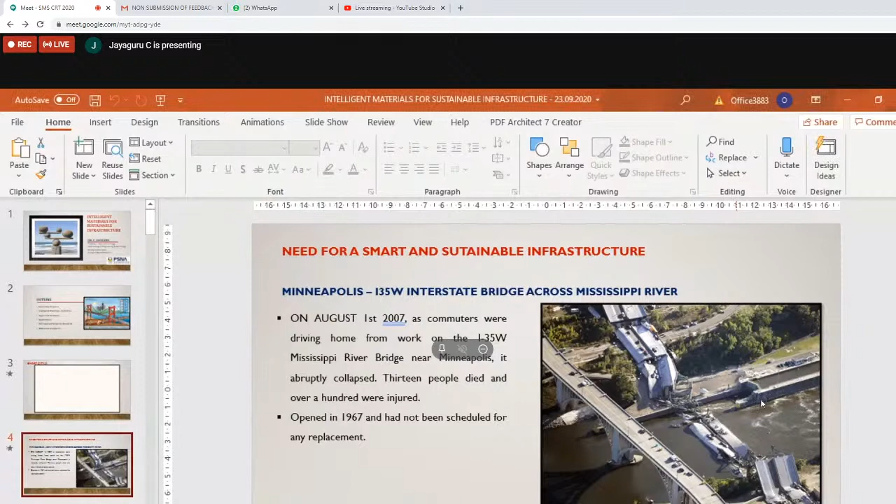Okay, then in that case, let me have the videos here. Is it audible now? No, sir, not audible. Okay then, let's leave it.

It's not a problem, let's go to the presentation. It seems video is not smart. Cities are smart, videos are not smart. Okay, then it's not a big issue.

Okay, now let's come back to the presentation. Why are we speaking about this smart and sustainable infrastructure, or where is it needed?

Actually, is the voice now audible? Rajesh Kumar sir, is the voice audible? Yes, your voice is audible, sir. Okay then, I'll skip the videos because there is some problem with the video presentation. It's not a big issue.

Now let us look into the meaning of the word sustainable. When we look into the simple definition, it is able to be maintained at a certain level. That is, we have to maintain some resource, environment, or material performance at a certain level without compromising the ability of future generations or their future responsibility or functionality. That is what is called sustainability.

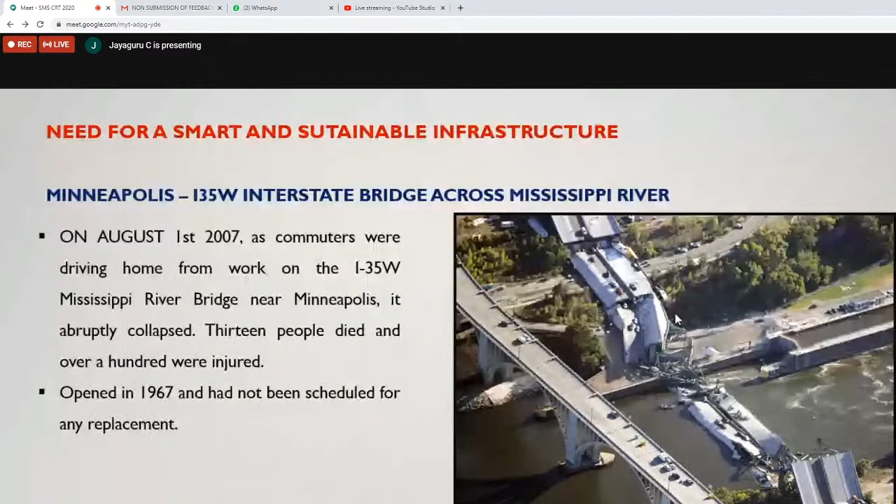This bridge is a truss type bridge with concrete girders, actually a steel concrete composite. It abruptly collapsed. When it opened in 1967, they were planning for scheduled maintenance, but though there was some little level of maintenance, there were no proper repair or replacement strategies. So in 2007, all of a sudden, the bridge collapsed.

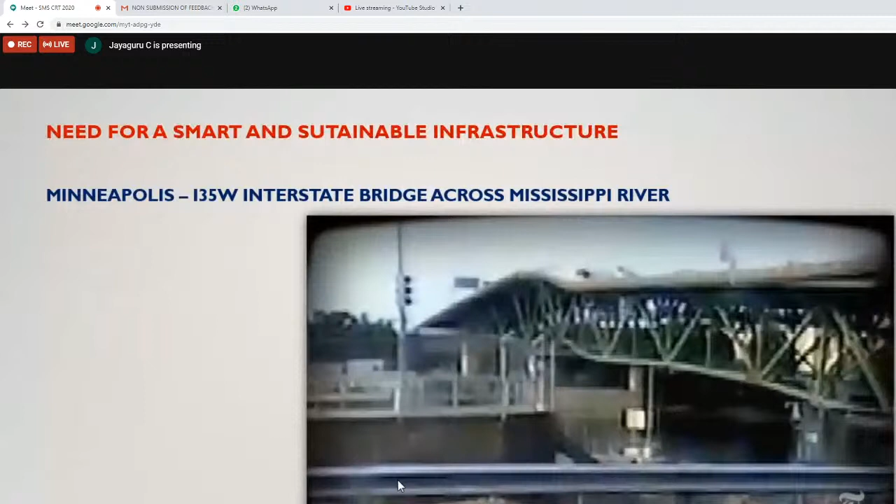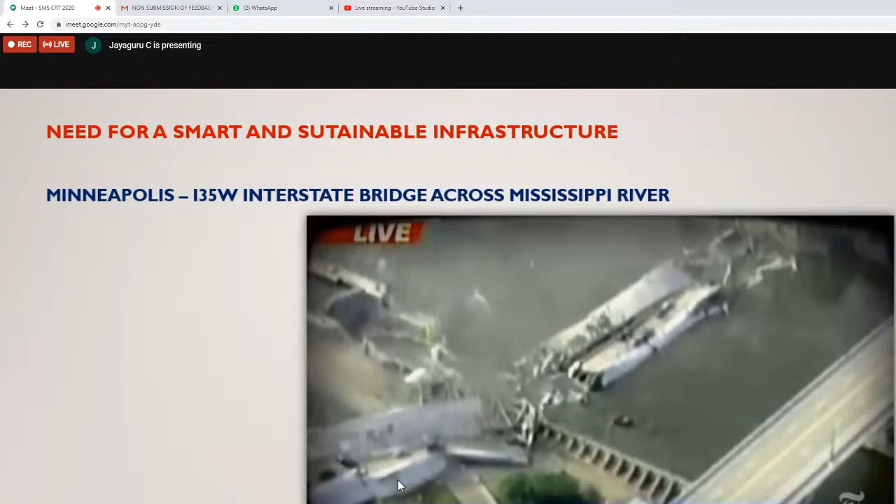Again, there was a video about that bridge, but I think you may not be able to hear it. Okay, I think there is a problem with the audio.

What actually happened here is in 2005, during an inspection, they reported that the structure was structurally deficient and repair had to be done. But the local authority in Minnesota state said all the bridges are having problems, so they simply ignored the engineers' information to go for repair. So the bridge all of a sudden collapsed. This means we need to do something to monitor the level of performance of bridges.

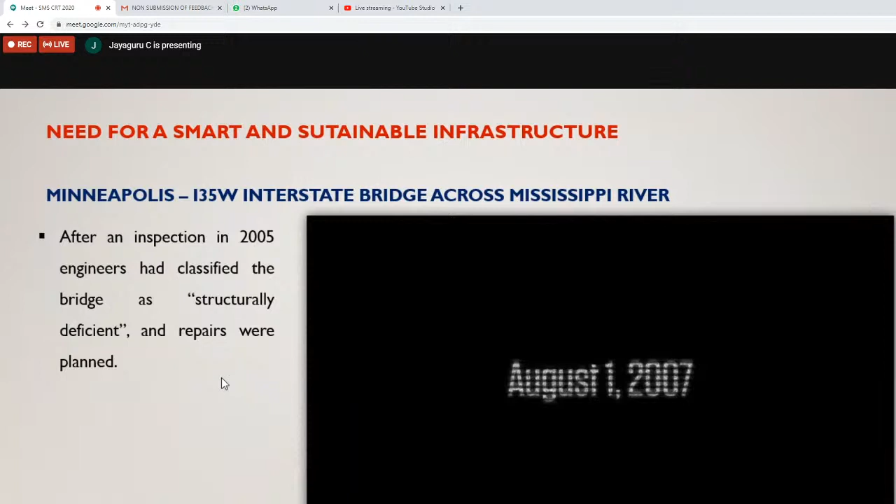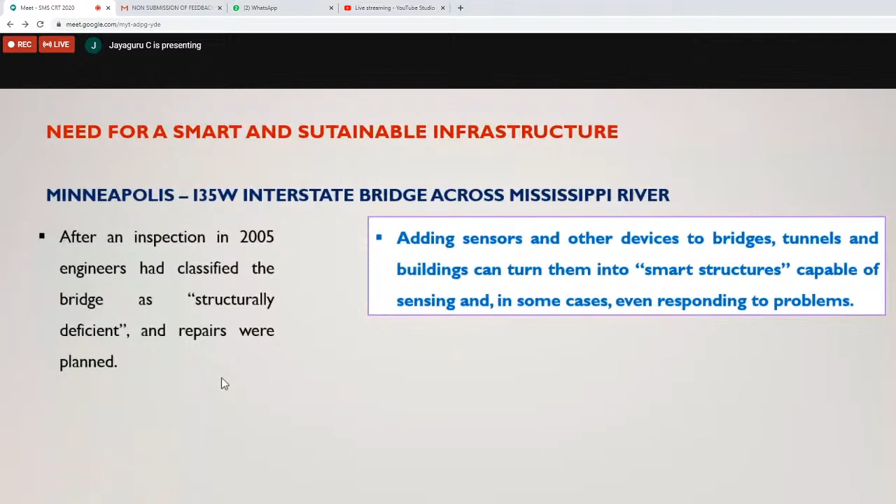So what is the ultimate solution? Adding sensors and other monitoring devices to bridges, tunnels, buildings, etc., can turn them into smart structures, capable of sensing, and in some cases the material can respond to the problems.

With this, let me go into the next slide on smart city features, where these intelligent materials are needed. Let me take the smart city features context from our Ministry of Housing and Urban Affairs, because our government has taken one of the thrust areas as installation or erection of smart cities all over the country. As per the statement of our Honorable Prime Minister of India, within 10 years many cities should be smart, and they have allotted a lot of funds or budget for that.

So from that smart city feature definition, I have taken this word. What they are telling is, in that last context, the government is giving many features.

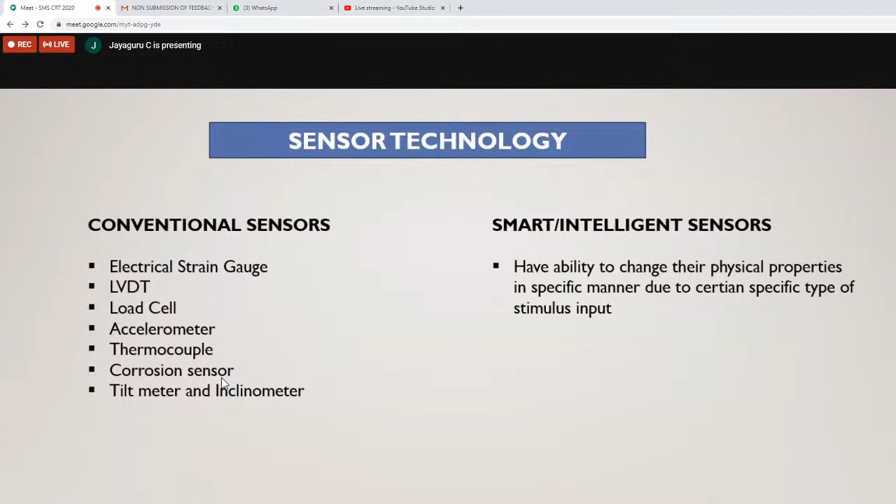Before looking into the first material, shape memory alloy, I would like to give a definition for smart civil engineering infrastructure. A car we are buying for some 6 to 10 lakhs has got nearly 10 to 15 sensors in it. Why can't a civil engineering structure have a sensor?

The structure can automatically adjust its structural characteristics and respond to external disturbances, particularly for its safety. So we have to incorporate these types of sensors in buildings to improve their lifetime and serviceability. Smart materials can be integrated into a structure to provide functions such as actuation and monitoring and self-adapting. The previous speakers would have addressed self-healing concrete, where the concrete is able to lock its cracks. Those types of materials are also smart materials.

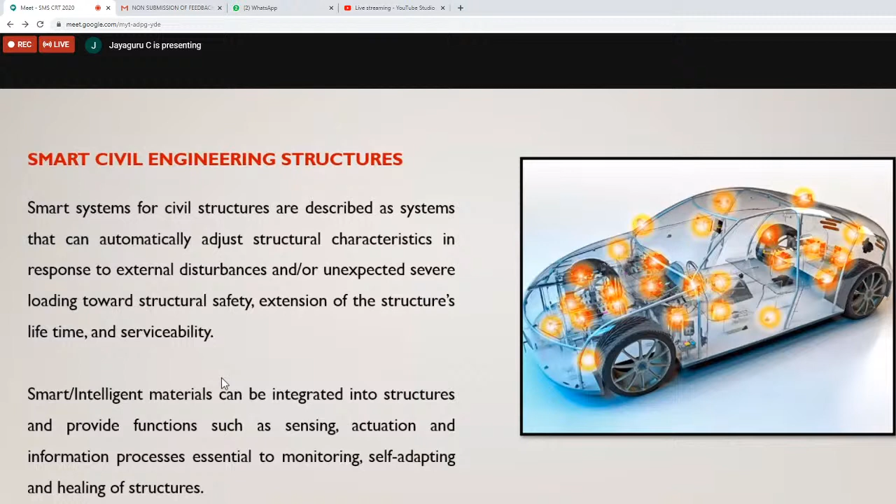So comes the shape memory alloys. Though the morning speaker has addressed it, it is my responsibility to define it again. I am going to look into only the applications, not the technical part. Shape memory alloy is a metallic alloy that possesses the ability to regain its previously defined shape or size when subjected to appropriate thermal or mechanical changes. Mechanical in the sense, some extension.

In civil engineering, shape memory alloys can be either passive, semi-active, or sometimes active. Particularly in the case of seismic safety, these shape memory alloys will be used as an active device to reduce the effect of earthquakes, particularly the deformation, as they have more ductility or good mechanical behavior.

What are the types of SMAs available in the industry? One is copper, aluminum, and nickel alloy. Then comes nickel and titanium alloy, that is actually called nitinol. Then comes zinc, copper, gold, and iron alloy, which is a ferrous alloy. Out of these three, or a few other alloys are also available.

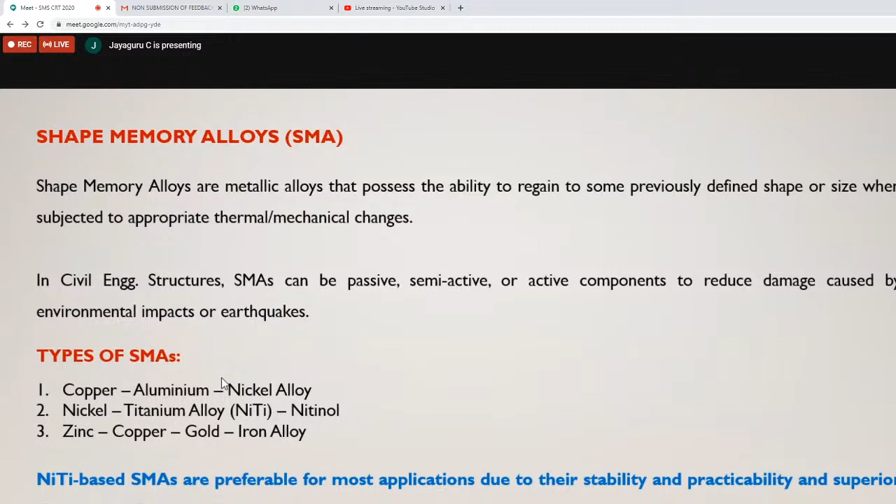The nitinol based, or nickel and titanium based, shape memory alloys are preferable for most applications in aerospace technology as well as civil engineering applications, because they are highly stable and have superior practicability and thermomechanic performance. This nitinol has two unique properties: one is shape memory effect, the second one is super elasticity.

The shape memory effect, I am going to say, is only on heating. This is a phenomena wherein the shape memory alloy will return back to its predetermined shape upon heating. So when you are able to heat it, it will have that memory in it and it will come back to its original shape.

For example, you have given the memory to be a spring. On YouTube, many videos are available showing examples with a nitinol spring. When they extend the spring and convert it into a rugged shape, and insert that into hot water, the spring will revert back to its original shape, the nitinol wire will revert back to the shape of a spring. Apart from that, nitinol has got super elasticity, or a high level of ductility, particularly in the nonlinear behavior.

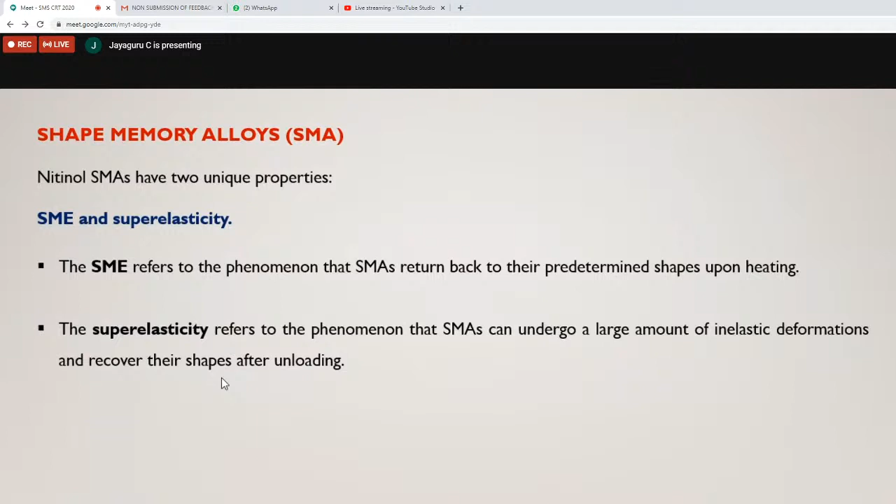It has got the phenomena wherein it can undergo a large amount of inelastic deformation and it can recover its shape even after unloading. That is a mechanical performance, it will be having a good thing. So here the two things.

The morning speaker was speaking about austenite and martensite. Look at this second diagram. The bottom level was austenite. When the stress is increasing, it becomes martensite. There are two crystal phases in shape memory alloys. The austenite phase is stronger, and at higher temperature, it will be in the austenite phase. When it has a low temperature, or if the stresses are high, or you have given some elongation, it will convert into a martensite phase.

Here you can see the second picture. From the austenite phase, it is transforming into martensite phase. That is when you are giving a stress and there will be a strain. When you remove the load, it converts back into austenite phase. Here, the original shape is like this. You are deforming it into some other shape, and after heating, it will return back to its original shape.

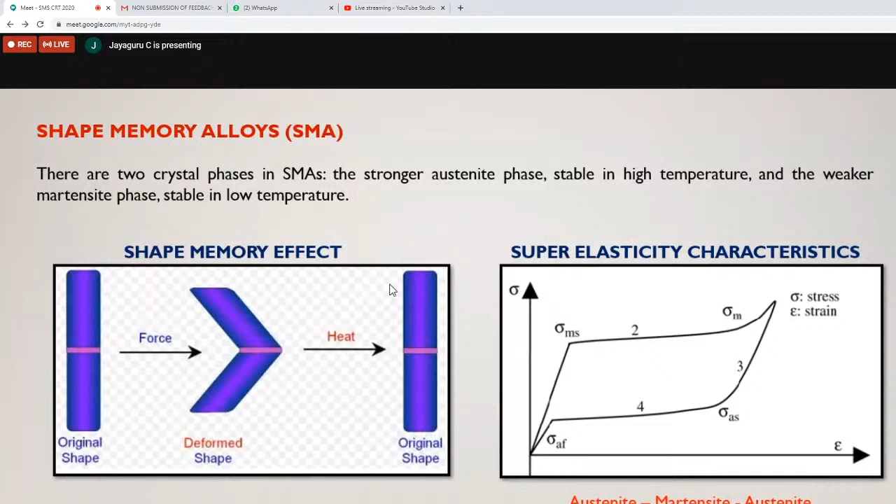So here, actually, I have got a video. Please bear with me, even without audio I think you are able to see it. They will be illustrating the performance of this nitinol wire, wherein you can see two major physical features, that is the performance of this nitinol. One is the thermal performance, that is when it is heating, it is coming back to its original shape or idea, and when it is deformed, it is going back to its previous shape. Just have a look at this video, please bear with me, even without the audio.

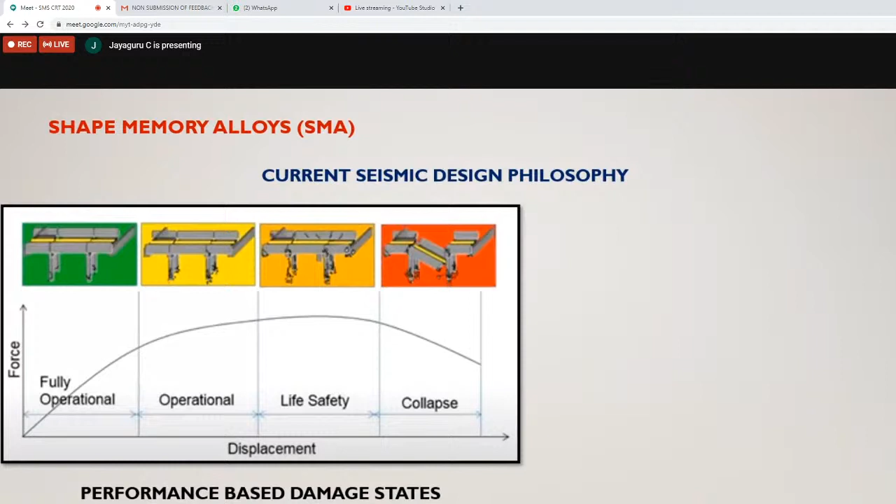But what will happen to the infrastructure? You look into this picture, there are hinges formed at the top of this pier and even at the bottom of the pier, which we cannot repair even after a severe earthquake. So what will happen in those cases? For example, the government is constructing infrastructure, bridges, at a huge cost, several crores of rupees will be invested. And if these damages are permitted, what will happen? Is it really a success? Imagine there is a bridge connecting two cities or two important places, and that bridge is totally collapsed or has lost its performability after an earthquake. So what will happen? That bridge has to be reconstructed after a few years, or it should be closed for traffic, and severe repair actions have to be taken on.

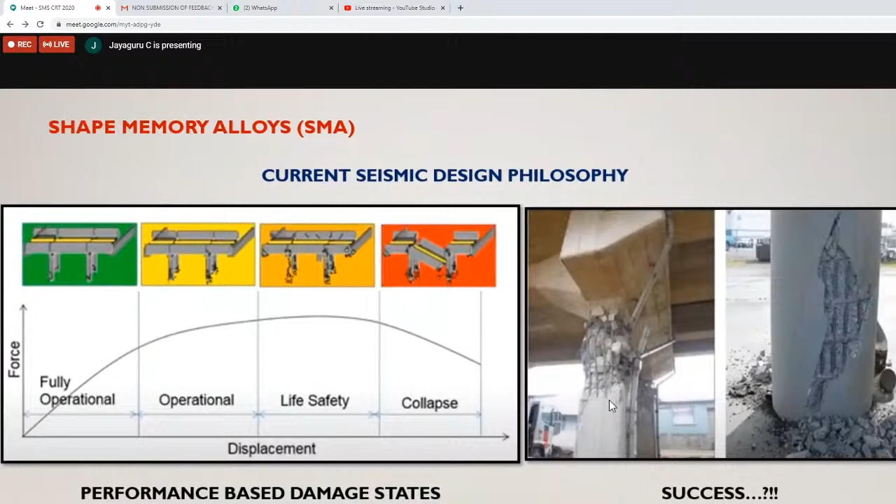So in these cases, we have to look into the next level, that is performance based design. So what is that performance? How to improve the ductility behavior of such bridges? So here again, in University of Illinois, they have tested 4 sets of columns to understand the super elastic characteristics of shape memory alloy. So what they have done is they have gone for retrofitting. In the first column, they were testing with cyclic load behavior, without any retrofitting. In the second column, they retrofitted with the normal conventional method. So can anybody switch on the mic and say what is the conventional method of retrofitting a bridge pier?

It's a carbon fiber wrapping or jacketing, exactly. That is the very standard conventional method we follow nowadays. In olden days, we used to go for concrete jacketing or ferro cement jacketing, but nowadays, as pointed out, we go for carbon fiber sheet wrapping. Many researchers have completed studies on this, and it's in practice in many countries. Even in our country, we use CFRP jacketing or GFRP jacketing.

In this video, there's again a problem with the audio. What this Illinois team has done is test a normal FRP jacketed column with cyclic loading, and they incorporated SMA wire spirals to improve ductility behavior. In the fourth column, they made a hybrid combination with FRP as well as super elastic shape memory alloy wires, and that fourth column had an extraordinary performance.

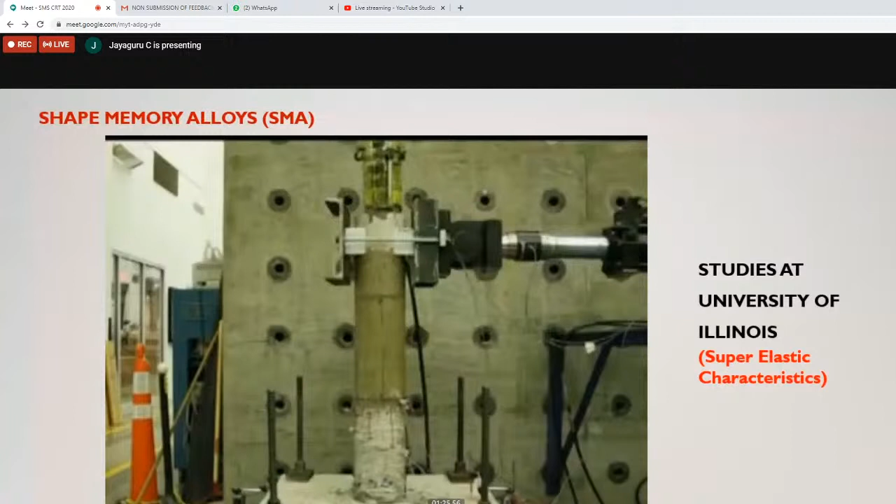In this picture, you can see there are spirals as well as FRP jacketing. When tested with cyclic loading using a servo hydraulic actuator in a strong floor, they exhibited much better performance with a very low level of rupture, and there was no crack. All the cracks were arrested. What was happening is the shape memory alloy gave a good level of ductility. In the next slide, I'll show that.

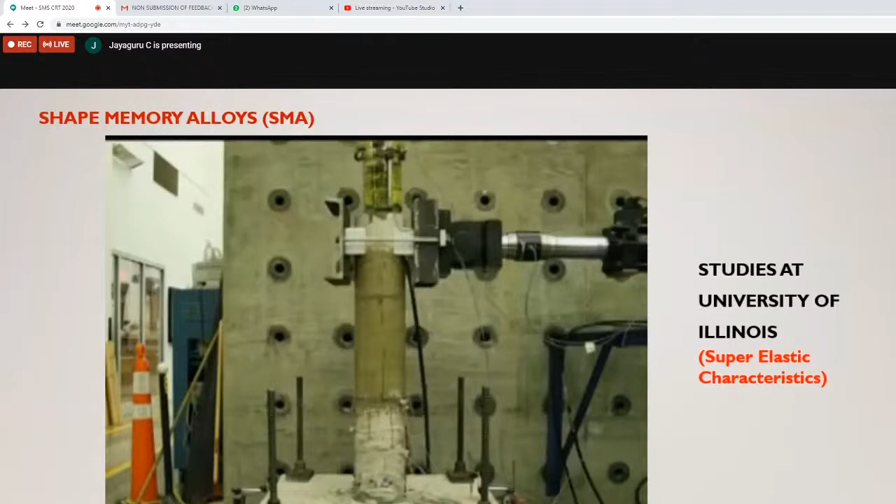Normally when you take a conventional rebar, even a HYSD bar, after the yield point, as the speaker in the morning presentation also pointed out, it goes into an inelastic range, and when you remove the load, it undergoes permanent deformation. So there will be permanent deformation in HYSD bars or any ductile bars.

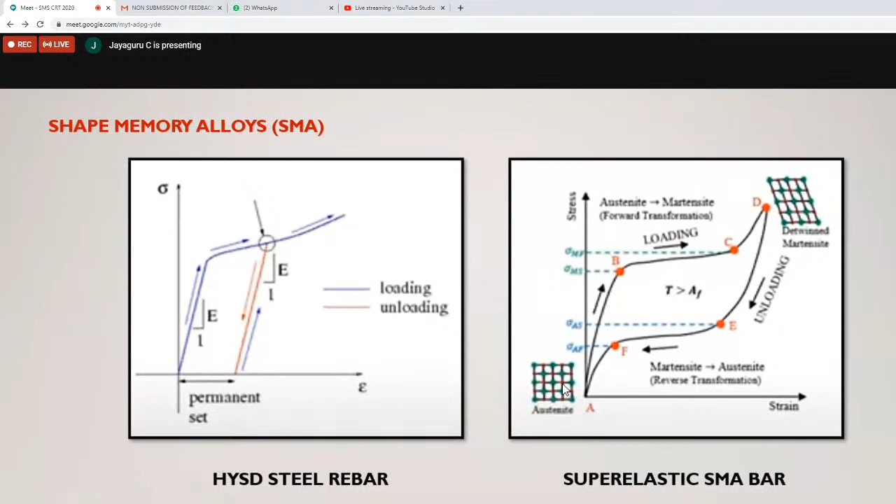But in the right side picture, when you apply stress or load, particularly during earthquakes or cyclic loading, the material goes into the martensite phase and comes back to the austenite phase, so there is no permanent deformation. The material remains as it is. When you use this rebar in a column, the material stays as it is and the column achieves a good level of ductility, extraordinary ductile performance.

In the next slide, you can see when a steel reinforced RC column undergoes reverse cyclic loading, the hysteretic curves show a higher level of deformation, whereas with the same amount of hysteretic curves for the SMA case, the deformation is similar but there is no permanent deformation. When you complete the test, the column remains as it is with only a few minor cracks, and there won't be any problem.

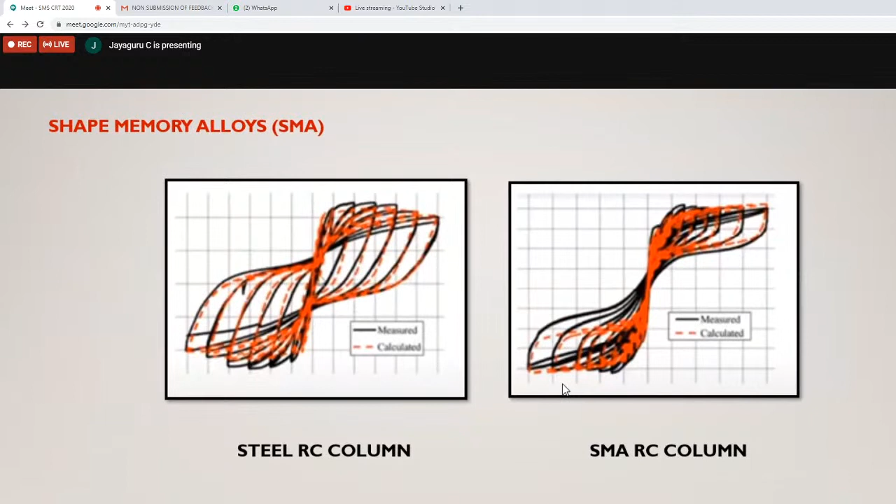What we can suggest here is, as faculty members, we can go for a good amount of research. At CBRI Roorkee also, they are doing research with this SMA reinforcement. We can also start our own level of research, go for severe studies, and go for analytical investigations.

Now looking into the analytical investigation: whenever you're identifying some shape memory alloy, particularly nitinol, we normally do a moment curvature analysis. For those who want to do analytical investigations, I'll give a small idea. We have to choose the moment curvature characteristics of that particular RC section with the shape memory reinforcement, go for incremental dynamic analysis, and set the performance limit, that is life safety or collapse.

Normally when you do pushover analysis, particularly in software like SAP 2000, you fix the performance limits. If it's a critical structure, immediate occupancy will be your performance limit. If it's a normal structure, we can go for life safety as the performance limit. You set the performance limit and identify the dynamic pushover curves for different ground motions, with the percentile curves varying. Finally, you obtain the drift limit and select it so you understand the performance level of different SMAs.

So I would insist many research scholars, budding engineers, or budding faculty members in this audience go for more research in shape memory alloy reinforcement. Even though the material may be costly at present, with gradual application we will be getting it at a cheaper cost, and you can go for analytical investigations.

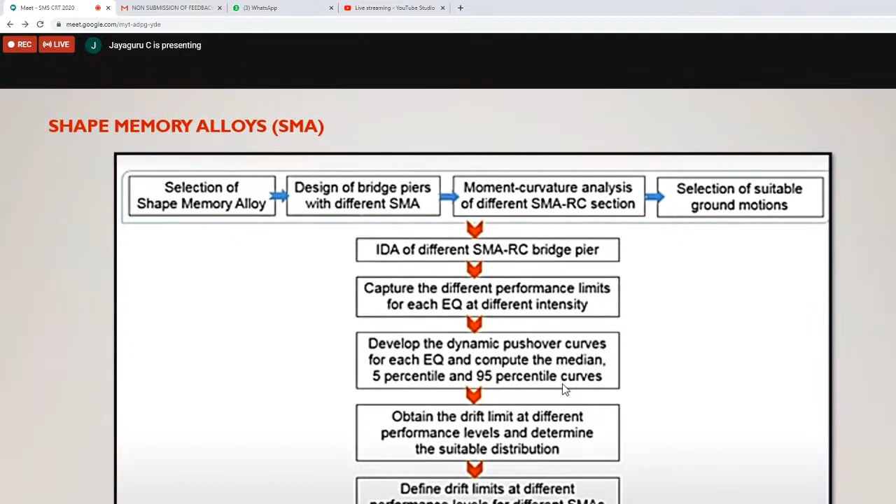So then I am going to shift into the next material called magnetostrictive material. This is the second material in my list. So what actually is magnetostrictive? As I defined already, every smart material will have certain change in their characteristics. So here what this material is doing is, when exposed to a magnetic field, it will change its physical shape.

You can look at the picture here. There is no magnetic field. When a magnetic field is applied, the material will elongate. It will elongate and have a change in their physical shape. So where it is applied is in the defense area.

So particularly, I should make a note mainly in this context: most smart material, be it shape memory alloy, magnetostrictive material, or piezoelectric material, is first applied in practice in the defense area, particularly in aerospace technology or military. Then it gradually comes into practice in common structural engineering, mechanical, or automobile applications. In sonar systems, that is sound navigation and ranging, they used to have this magnetostrictive material in great applications.

Hydraulic valves wherein the fuel injection systems are used, aerospace technology. Nowadays, this energy harvesting is picking up with a great pace. Energy harvesting using magnetostrictive material or piezoelectric material is a very big level of application, wherein you would have heard in the news people have started laying energy harvesting roads. The piezoelectric elements will be fitted in the roads, and when the vehicle is moving, there will be energy created and it will be stored in capacitors. And structural health monitoring of pipes, etc.

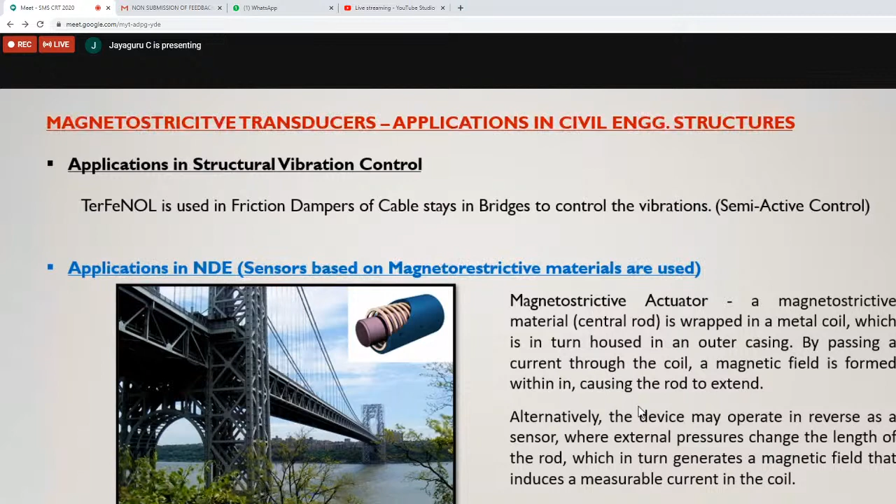This is having a little limited application in the structural engineering field. So I am just giving out this application.

And with that, I am just going to the advantages and drawbacks. So this picture, before looking at the advantage and drawback, shows the testing. It is like normal sensor testing. We can test the capacity of this particular magnetostrictive material when it is fitted with concrete. And here they have fitted it with small prisms. They are testing this magnetostrictive material and how it is getting transformed into magnetic phase or how it is getting transformed into the elongation phase.

So looking into the advantage, we have listed already quick response, high energy density, wide operation frequency, but there are more drawbacks particularly for this material. That is, we need to have a controlled magnetic field, otherwise it will not function properly. The unknown interaction between the compressive stress and the magnetostrictive response will have some negative effects. It will not have a guided performance. The power supply, if it is interrupted during an earthquake, we cannot magnetize the material, there will be disaster for the control structure also. We cannot have a controlled level of maintenance.

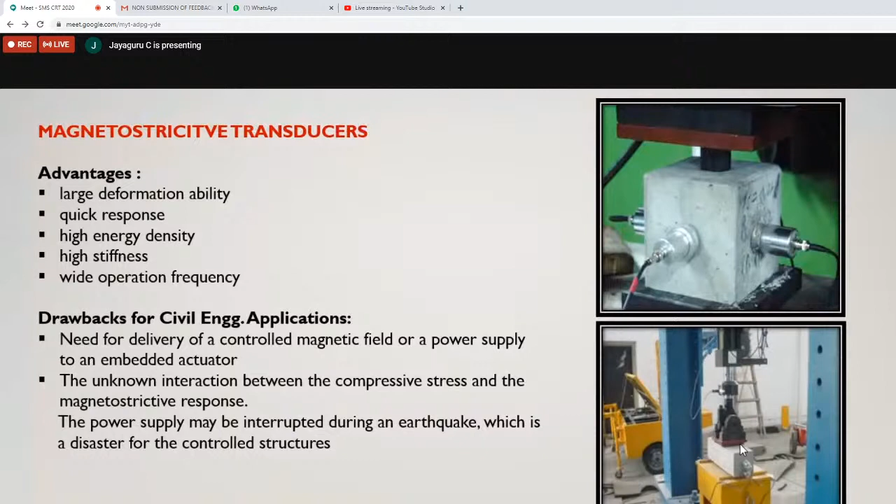So with this background, let me jump into the next material, or the most important health monitoring material, called piezoelectric sensors.

Before looking into piezoelectric sensors, this word so far I have not touched in my presentation, but the previous speakers have used this word very often: structural health monitoring. Let me throw light on this, then I'll have a discussion on the piezoelectric material.

Structural health monitoring is the process of implementing a damage detection strategy. What is your strategy? I'm going to fix this word strongly, because there are many SHM strategies. One person will follow a different level of strategy, and it varies from country to country, even from one municipal corporation to another, particularly when monitoring bridges, road networks, or critical infrastructure buildings.

This process involves observation of a structure over a period of time, and extraction of features from the measurement. That is, we have to collect the data and analyze it to get the current health of the system.

Even in our house, we normally do this. We used to observe the pipe network or the water tank. If you have constructed a reinforced concrete water tank, you look into it at least once every 3 or 6 months, or in your entire house, to see how it is performing, whether there is any structural crack or active crack, etc.

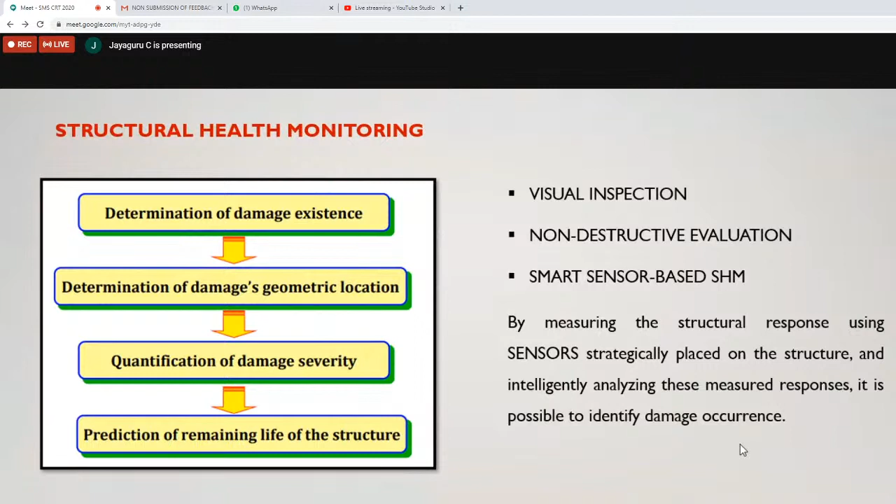So the strategies - I was telling you the word strategy. One strategy is visual inspection. Another is non-destructive evaluation. The third, or the modern recent strategy, is smart sensor-based SHM strategy, by measuring the structural response using sensors strategically placed. Again the same strategy comes into picture - you have to understand where to place the sensor. This sensor will intelligently analyze the measured responses, and we can identify where the damage occurrence is. Sitting at our office, we can look into that particular thing.

So piezoelectric sensors are a perfect choice for SHM.

In the 1970s, they used wired systems, wherein lots of wires were used for monitoring, and independent sensors would be fitted, used only for monitoring. A person would daily go and have a look at the monitor, note down the reading, and then come back to their office.

There are wireless optic sensors also available, but they are all conventional sensors - used only for monitoring.

Now, in the present decade, from 2010 onwards, many researches were going on, and from 2015 many countries started erecting smart sensors. With the application of Internet of Things, sitting at our office or in a control room, or with your mobile, you can easily control or monitor the performance of your structures. These type of things are also used in energy harvesting, cultivating energy.

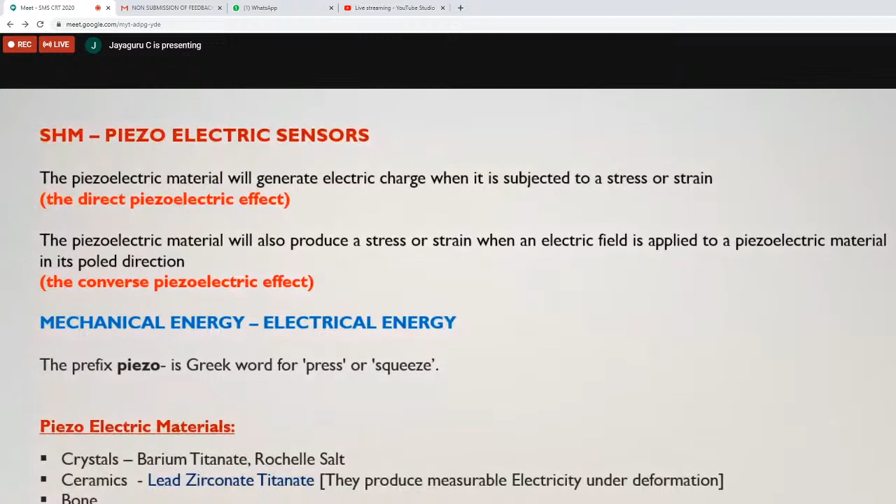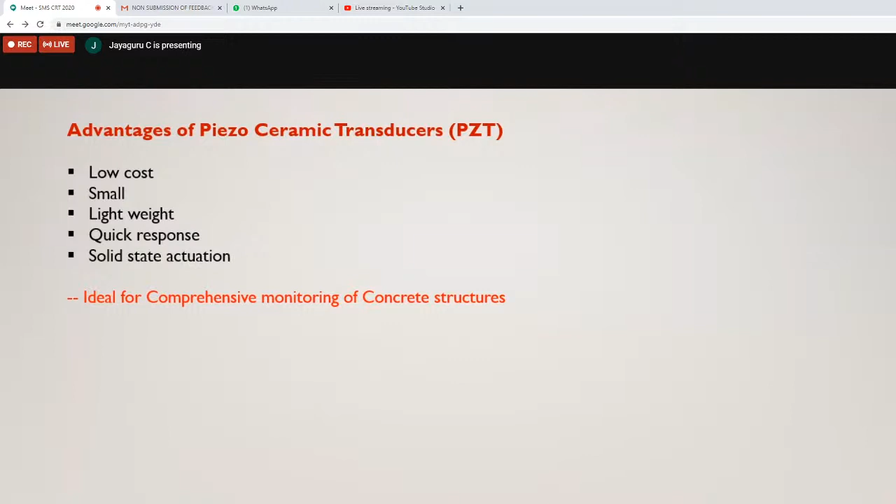So what are the advantages of these piezo ceramic transducers? They are low cost, small in size, very thin, delicate, light in weight, and have quick response. They have a good level of electric generation, which is why we use the word quick response, and it is solid state, particularly in actuation. So it is very ideal for comprehensive structural health monitoring.

Other applications of PZT - I'm just skipping through these - include microphones and automatic seat belts, where whenever there is an accident or rapid deceleration, this piezoelectric material is used. In olden days they used a mechanical gear type arrangement, but nowadays automobile industries have gone for piezoelectric. In your kitchens, when you turn the knob on electric stoves, it will automatically glow - electricity is given, which creates mechanical energy that produces pressure, and a spark comes and lights the gas automatically. So when you use that in your kitchen, you are already exposed to piezoelectric material.

In microphones, it is fully piezoelectric nowadays - modern microphones are all piezoelectric. And in restaurants and airports, automatic doors work when you step on a particular level of floor - the floor exerts pressure, which generates electricity, and the electricity automatically opens the door. It is not like the light sensors used in olden days; nowadays piezoelectric automatic doors are used.

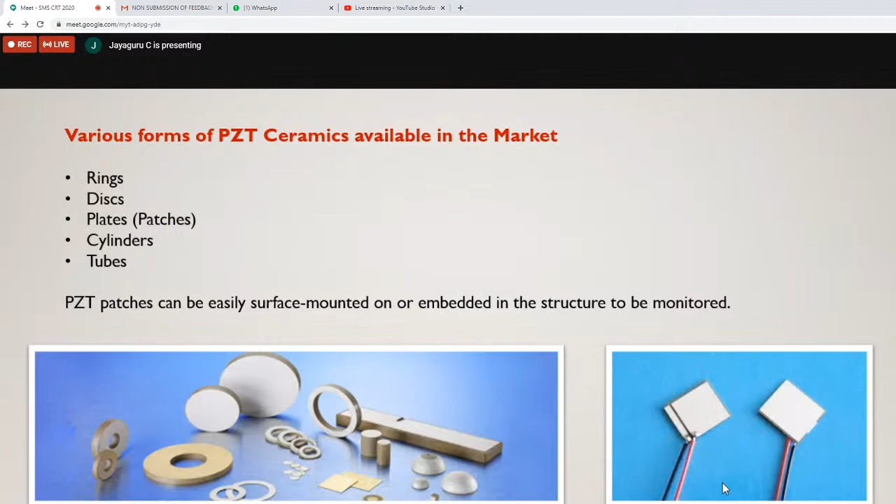Now, in piezoelectric based health monitoring, there are three methods - I am not going to go deep into this. One is the impedance based method, the vibration characteristic based method, and the Lamb wave based method. These are all different methods of monitoring - that is, when collecting data from a piezo ceramic sensor, how far it is going to get assessed. So there's electromechanical impedance method, pressure or vibration method, and Lamb wave based method.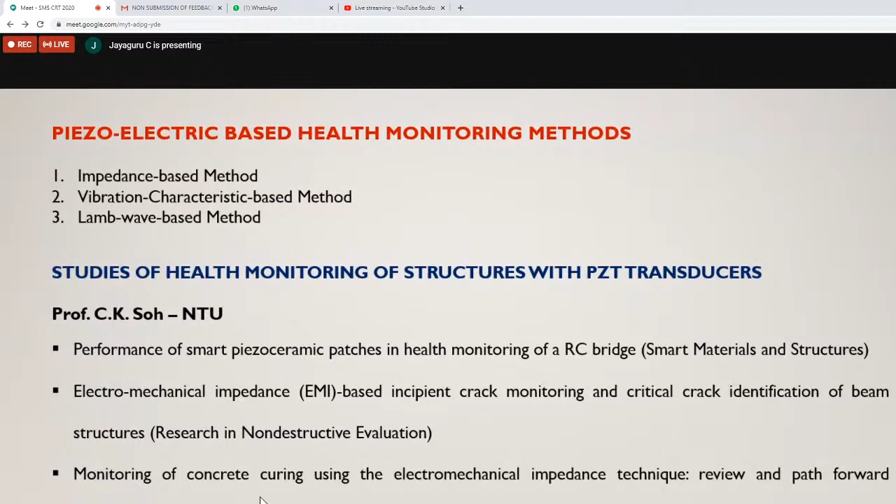Now let me give you some research that was in practice in many countries and industries. One is Professor C.K. Soh - a very important person in structural health monitoring at Nanyang Technological University. I happened to visit his lab once in Singapore, and he has done a tremendous amount of work. His method of approach is electromechanical impedance. They tested RC bridges, and this paper was published in the journal Smart Materials and Structures. They tested an RC bridge using electromechanical impedance based crack monitoring, and monitoring of concrete curing was also done. He has done work on damage identification as well as curing, particularly in structural health monitoring.

Another pioneer is from Houston University in the state of Texas - G-Song. Whenever you go to Google Scholar and type the word intelligent, smart, or piezoelectric, the very first literature you will find will be from Professor Song, G-Song. He is a very important pioneer in piezoelectric applications and has tested several things. He has done research on bridge piers, and this paper is on a bent cap. What is happening here is they install several sensors, about 10, in the test specimen.

In the test specimen, there are 10 sensors installed in total, among which PZT3 and PZT5 are located. PZT3 is at this cross section, and PZT5 is at the top. In the end portion, PZT3 and PZT5 have been used as actuators. The actuator gives out electric signals.

What does the electric signal do? It will vibrate or try to make the piezo ceramic material vibrate. The piezo ceramic material will have some deformation, and that deformation will create vibrations in the entire structure. That vibration will be picked up again, because of the direct piezoelectric effect, wherein when vibrations are received, electricity will be generated. So you are giving in electricity, creating vibration through actuators, and sensing the electricity through sensors.

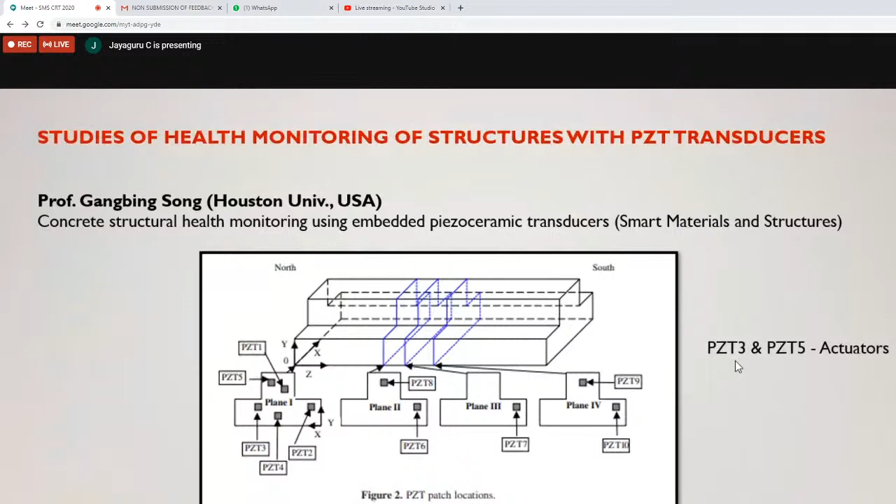Again, the mechanical deformation, that is mechanical vibration, is sensed through the remaining 8 sensors. So totally there are 10 piezo ceramic patches incorporated. Normally they will incorporate patches in 2 ways: one is surface mounted, the other is embedded. Here they have given this in an embedded form.

Professor Gangbing Song is more popular for the smart aggregate, because piezo ceramic material is vulnerable to water effect. Normally when you embed a piezo ceramic material inside a concrete or structural material, you have to protect it from water. So what Song and his research team have done is cleverly develop a smart aggregate.

In the smart aggregate, they embed piezo ceramic patches in mortar, with only the lead wire coming out. From that mortar cube, it is like a cover block. Just imagine like a cover block. It's very simple, just imagine how you are manufacturing cover blocks.

What they do is take the PZT patch, coat it with epoxy material for waterproofing, then insert it into the mortar mold. Then the mortar is cast, that is, the mortar is filled in, and the smart aggregate is cast. This aggregate is then kept at designated or strategical locations inside the column.

The right side picture shows the RC column which was tested with 6 PZT sensors. Same way, one will be used as an actuator, the remaining will all sense the data. If there are cracks, the sensor signals will come in a weak or disturbed way.

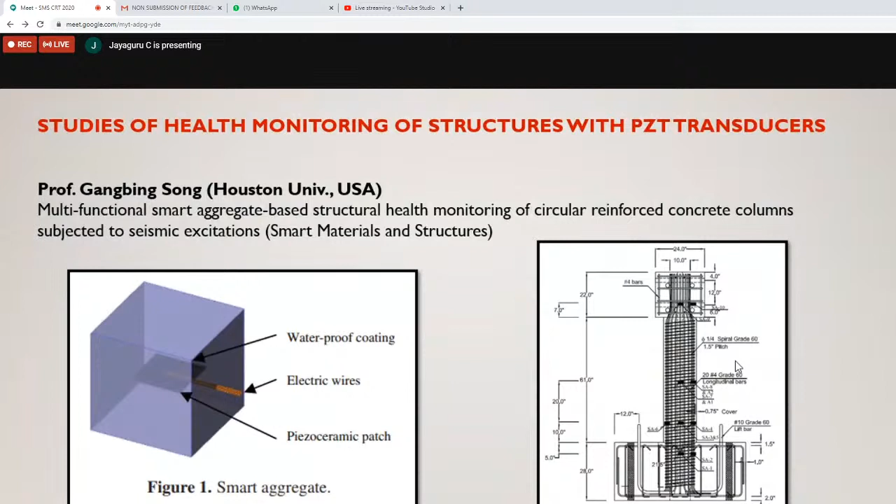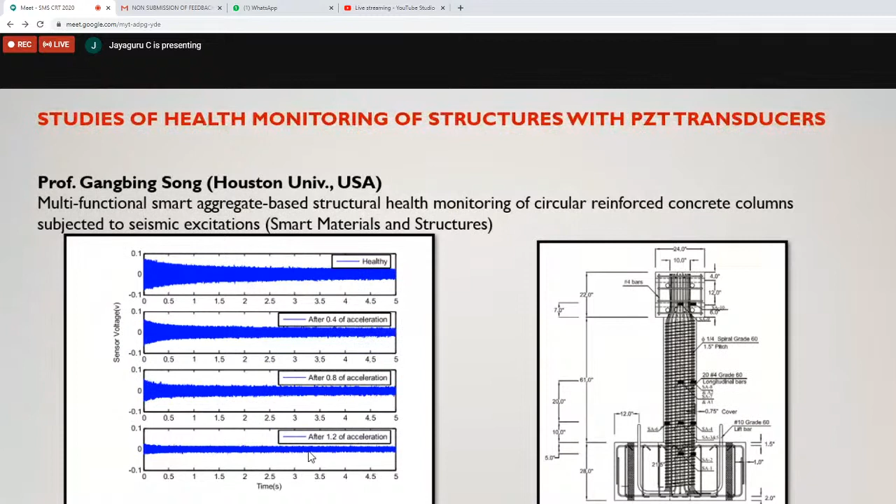After 1.2 g of acceleration, you can see there is a very meager strength of signal received from the sensors. What this means is that there are cracks or damages developed inside the particular column. These signals are mathematically analyzed through different methods, and it is incorporated into assessing the damaged state.

Similarly, in India, from IIT Delhi, Dr. Suresh Bhalla, who is a PhD student of Professor C.K. Soh at Nanyang Technological University, Singapore, has done tremendous research in this area. In his Construction and Building Materials paper, he analyzed 4 different configurations of piezo ceramic sensors embedded in concrete RC slabs, and assessed the life of structures after each impact.

He has also developed a Smart Material and Structures Laboratory at IIT Delhi. If you happen to visit IIT Delhi, please do visit that lab, it is a very nice lab. Dr. Naveet Kaur is presently working at CRRI, that is Central Road Research Institute of CSIR.

She has also done tremendous research with Dr. Suresh Bhalla, and they have given a lot of service to this smart sensing field. If you happen to read these papers and visit IIT Delhi, do visit their lab, you can get a good idea about this piezo ceramic material.

Similarly, at SERC Chennai, they have done research with surface mounted sensors. Dr. N.

Gopalakrishnan, the speaker of the first session, is also working on piezoelectric sensors at SERC. They have used surface patches in a concrete beam. In our institution also, PSNA CET, there is ongoing research with these PZT sensors.

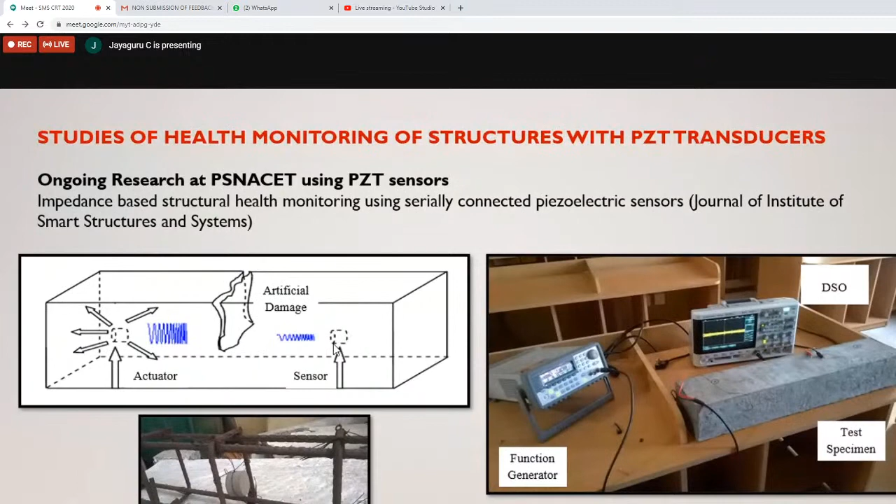Now let me show you. I'll take a break from this PPT and show this directly. This is the PZT sensor we are using in our institution. This is actually available in the market.

This is a very sensitive ceramic material, like the ceramic used in manufacturing tiles. It's a stiff material; if you break it, it breaks like a chalk piece, quite brittle. You can see the lead wires, positive and negative, soldered at the top. This is our sensor, and you can see its thickness - just about 0.3 mm thick.

Now, if you connect electricity, it becomes very interesting. If you connect a minimum voltage, like 50 or 100 volts, positive and negative, this patch will vibrate. We have tested this physically. If you connect this to a DSO and press it with your finger, you can generate electricity - that is the greatest boon of this material. This is a smart material: if you press it, it generates electricity; if you pass electricity into it, it vibrates. You can physically see this through your natural human eyes.

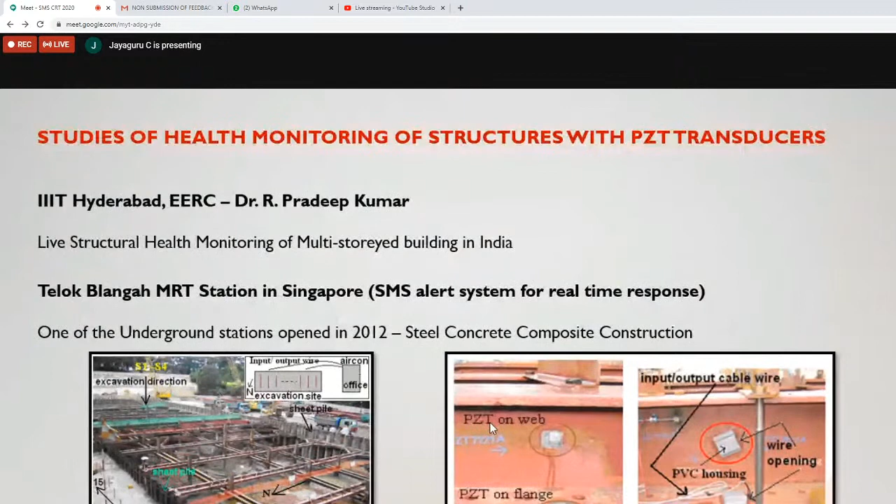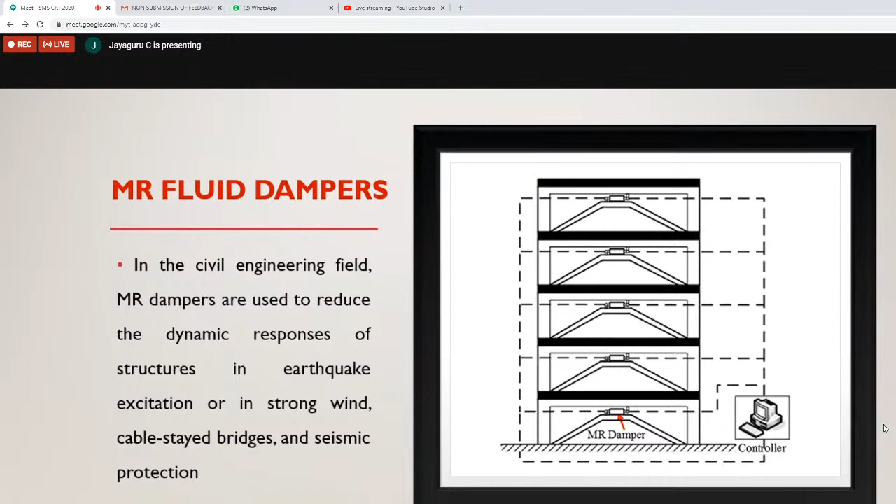This is actually a very good, smart, active device. It automatically gets triggered, which is why it is called active. When you are using a control room or control unit, it gets converted into semi-active.

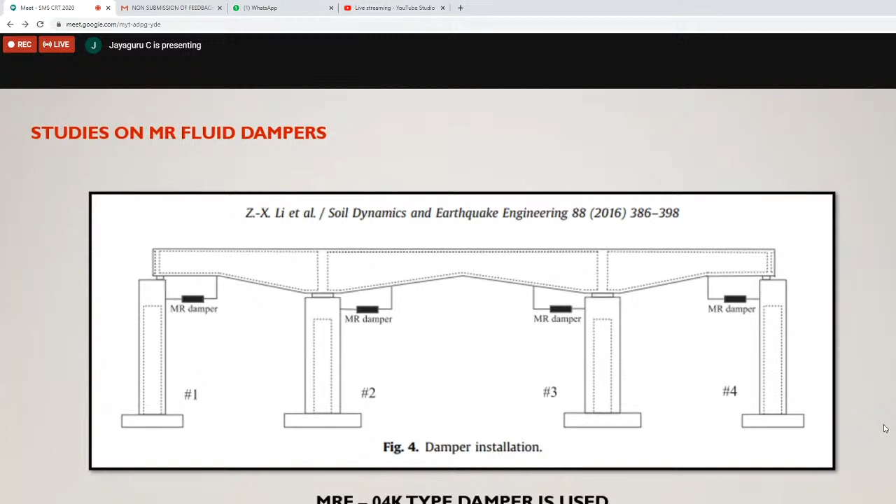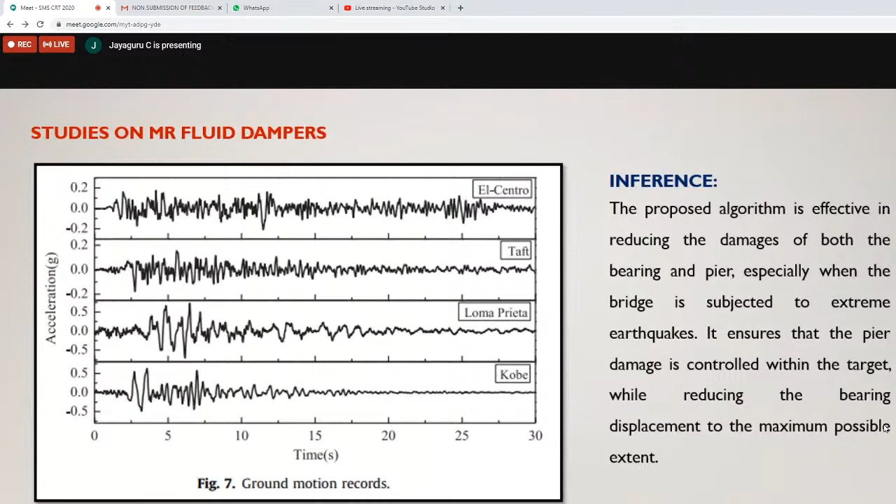This paper studied 4 different earthquakes: El Centro, Taft, Loma Prieta, and the Japan Kobe earthquake. The Loma Prieta and Kobe earthquakes had the highest peak ground acceleration values, so those earthquakes showed a good level of behavior particularly on structures installed with MR fluid dampers. This is another paper where fluid dampers are fitted - these 2 dampers are the MR dampers, you can see here.

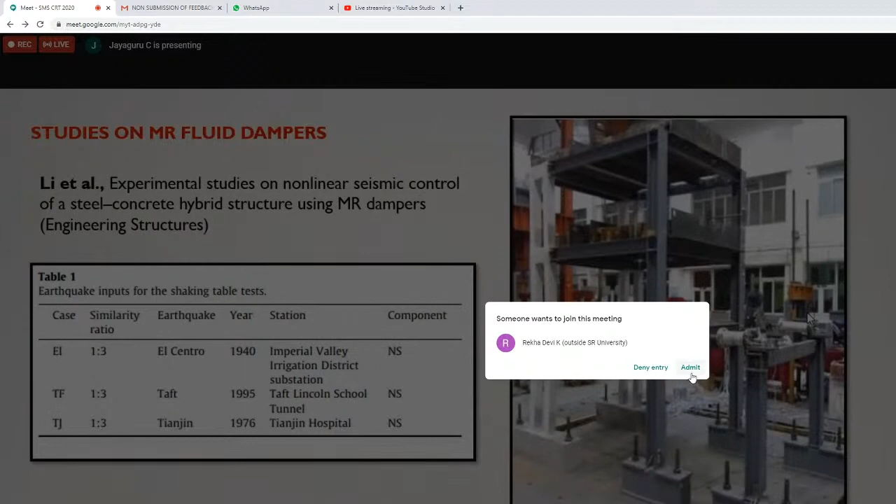This is another paper. Now for the real-time application in China, in Dongting Lake Bridge, they have installed these dampers. You can see the picture. Particularly, it's a rainy region and high winds are very common here, so they want to arrest the vibration.

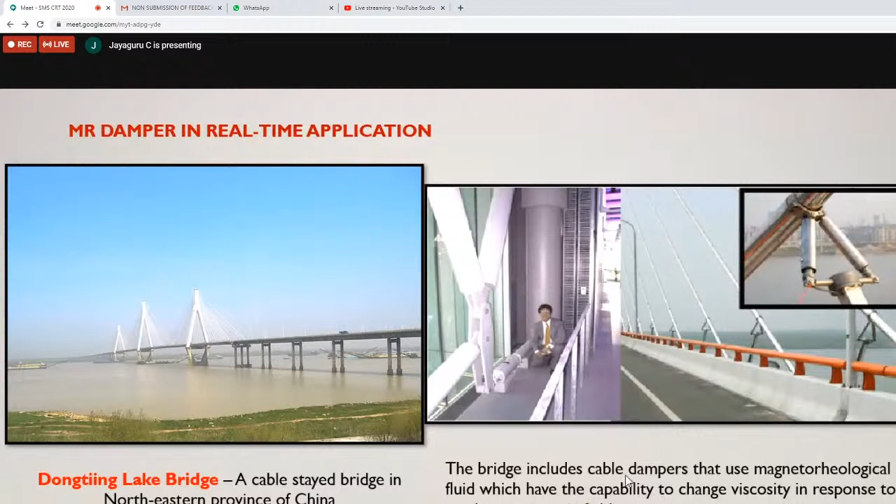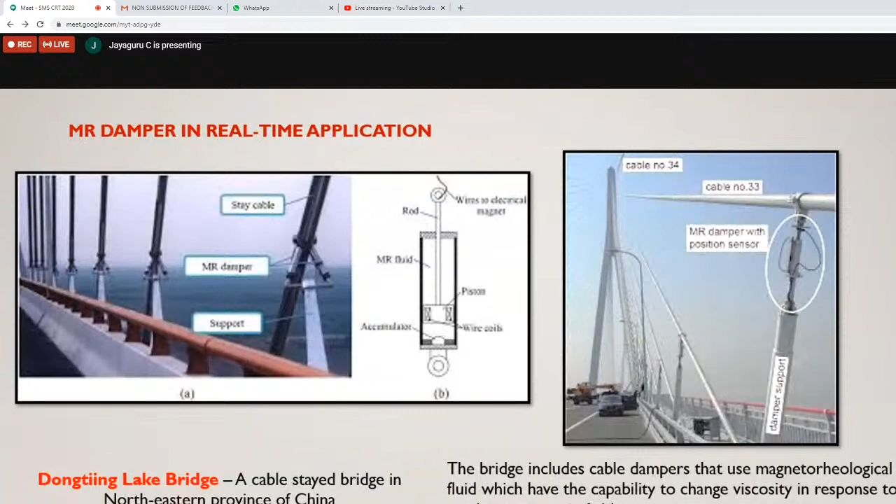So the bridge has cable dampers with magnetorheological fluid. Here you can see the MR damper with position sensors. All the cable stays are installed with dampers, and the dampers have the capability to change viscosity in response to the electromagnetic field. This is the picture - a real-time application of this MR damper.

Coming to the drawbacks, this is very costly. At the Structural Engineering Research Center in Chennai, they used this MR damper as a seismic shock absorber, purchasing a small experimental sample model costing around 1.5 to 3 lakhs - very expensive. Also, this fluid has a common problem of thickening, meaning it needs to be replaced once every 5 to 10 years. This is the biggest drawback.

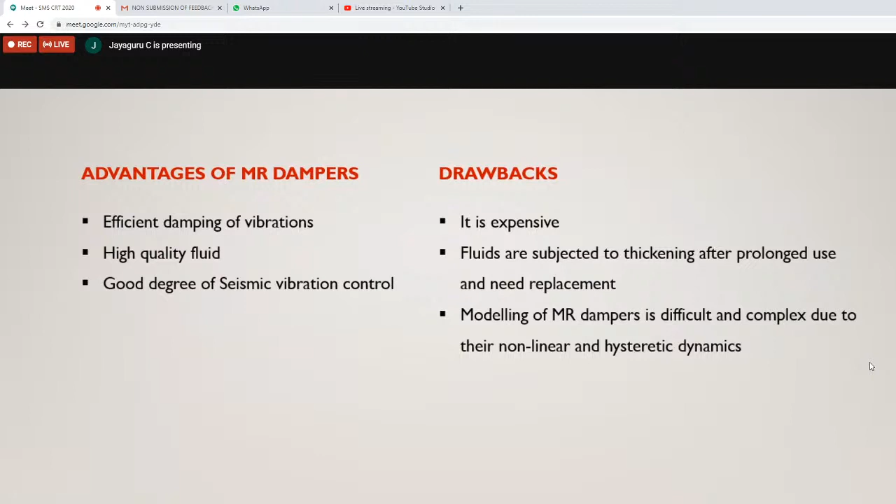But the advantage is it is highly efficient in vibration arresting, a good degree of seismic vibration control. Then comes the modeling - there are several papers on analytical models, but many are highly misguiding because it is very complex. Each researcher has gone a different way because of the highly irregular, non-linear characteristics of this MR damper. With this, I'll close the MR damper topic.

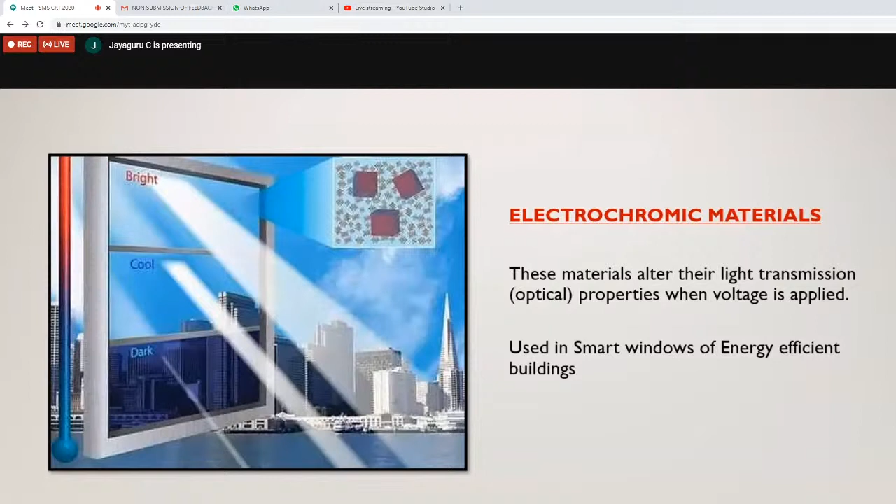Coming to the last material, electrochromic material. We normally have this in real-time applications - when light energy is transmitted and voltage is applied, the color of the light automatically darkens. That is smart glass, spectacles, etc. This is normally used in energy efficient buildings, where it regulates solar radiation and may decrease the heating and cooling effect.

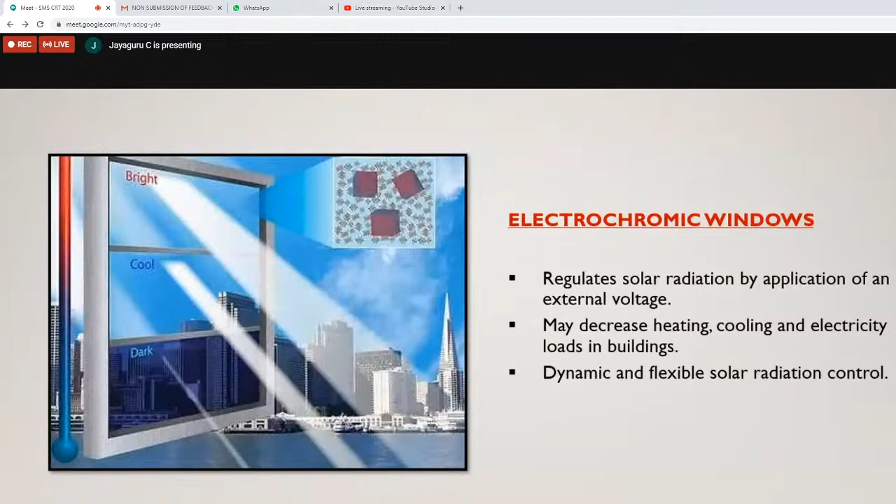As this material is actually related to architectural applications, I'm just skipping this material for our discussion. So with this, I'm coming back to the beginning slide.

That is totally, there are 5 intelligent materials I have listed, and I hope I have clearly illustrated the research aspects and their real-time application of particularly these 4 important materials. And I would request you people to throw light more on this shape memory alloy, particularly on its highly ductile behavior, then on this piezoelectric material, which is more relevant to structural health monitoring.

Now I have come to the very first picture where I have given the agenda of this presentation. Three infrastructure components are listed in this picture: one is a smart building, other one is a smart bridge, the third one is a smart tunnel. So with this, I'll conclude my presentation. This is the last slide.

So you can see the smart building, the sensors, that two set of buildings are there. And here I am just mentioning that the sensors in the building monitor the building's movement in response to strong wind or earthquake tremors.

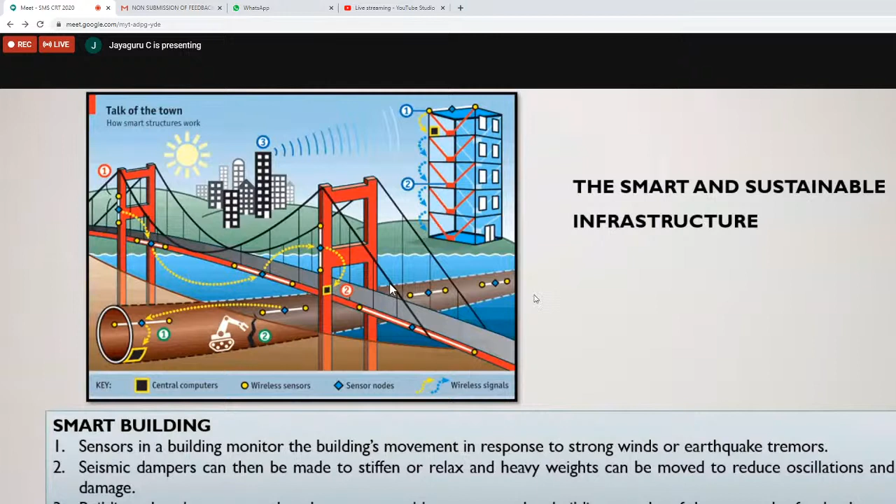The next one is smart bridge. The wireless sensors mounted on a smart bridge monitors the vibration. Normally in bridges, we need to monitor three main components: one is vibration, the next is strain or displacement, then the temperature.

Normally you would have seen in many corporations, people will sit on top of a bridge deck with LVDTs or strain gauges. They will measure after every 3 years or 5 years to monitor the performance of bridges. But in real time, physical monitoring will be difficult. So with these wireless sensors, we can easily monitor the performance of bridges through a network of sensors.

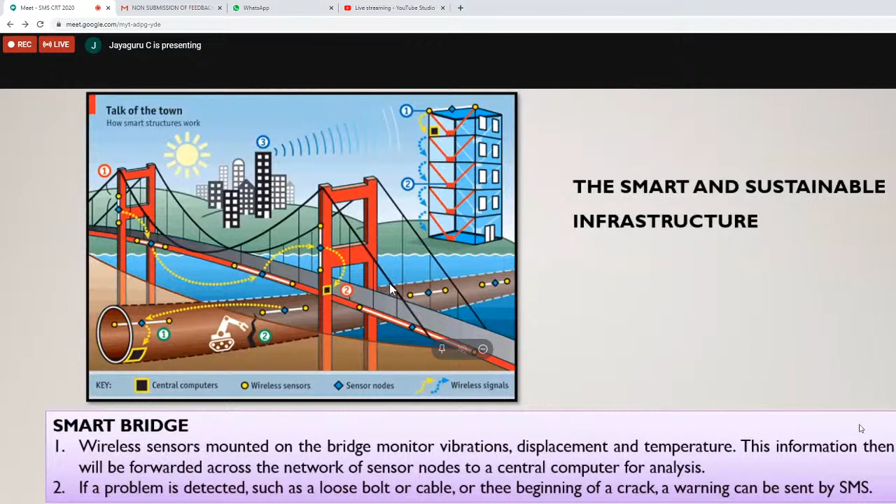If a problem is detected, such as some cable issue or there is a crack, etc., we can get a warning in our monitor sitting in our office or through even an SMS.

And in a smart tunnel, the wireless sensors mounted on the walls of a tunnel. Smart tunnel means it is not a normal water flowing tunnel. It can be a tunnel for a metro train transport system, or it can be a tunnel for a highway, etc. The tunnel monitors displacement, temperature, and humidity. Because it is an underground structure, you need to monitor the humidity of the structure or the system.

So this information will be forwarded through a network of sensors. If there is a problem, immediate alert will trigger out. And in future, a smart tunnel could even use robots, because you cannot go to all the points of the tunnel. You can use robots to perform some maintenance tasks automatically.

This is all the developing task. In another 3 or 5 years, we may even have all types of developments. So with this, the smart infrastructure, I think I have covered all these components, and I have listed 5 different intelligent materials and their applications. And I hope I have covered almost all the topics that I have listed.

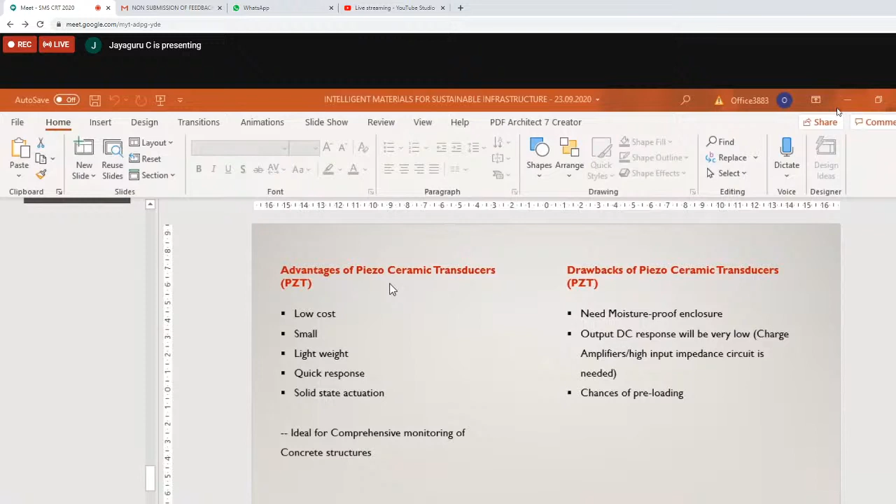Thanks a lot, sir, for a very informative and slow, steady presentation. Really excellent, we felt very enthusiastic, we didn't get bored in between. Thank you so much. I really apologize for the missing audio. No problem, sir, it's informative and understandable, we didn't even need the audio, within the video itself we could easily understand.

Thanks a lot for your wonderful presentation, sir. So many participants in the chat box are telling the same thing, direct feedback coming to you from the start. Most people are saying it's a very nice and informative session. If any queries are there, participants can ask, and I am ready to answer.

No question as such, sir, but it is really a great compliment that it is a smart session, and it has defeated the post-lunch impact. Congratulations.

Actually, I was given this session in the afternoon, and Dr. Rajesh Kumar sir was telling me he was sorry we are doing a post-lunch session. So I told him we will make it a little interesting so participants don't feel bored. That's what I was mentioning in the beginning, and we achieved it. Only the video was there, if audio was there it would have been more interesting. I have a few more videos also but was unable to play them.